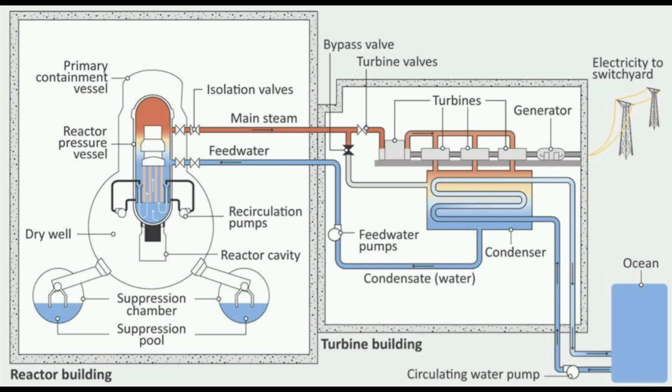Fukushima was not caused by a reactor design flaw. The reactors shut down exactly as they were supposed to. Control rods inserted, fission stopped. The real failure came later: a massive earthquake, a devastating tsunami, and then total loss of electrical power. What failed was not nuclear physics, it was dependence on powered systems.

After Fukushima, engineers didn't ask, how do we add more pumps? They asked something far more uncomfortable: what if we remove pumps entirely? What if safety does not depend on electricity? What if operators don't need to act immediately? What if gravity and natural circulation do the work?

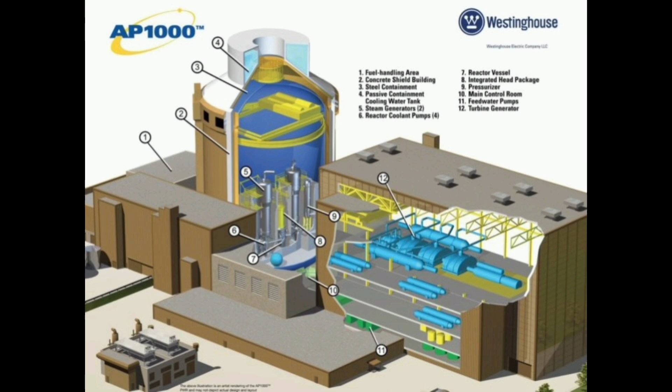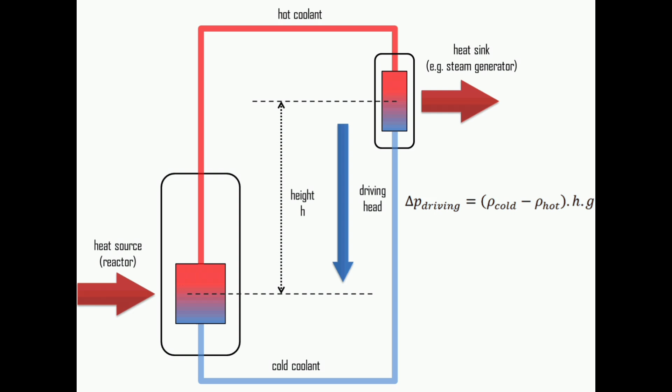That question leads directly to the AP1000. The AP1000 is built around one radical idea: if safety systems need power, they are not truly safe. Instead of fighting accidents, the AP1000 steps aside and lets physics take control. Water flows downward, heat rises naturally. Pressure differences move coolant without pumps. For at least 72 hours, the reactor remains stable, on its own.

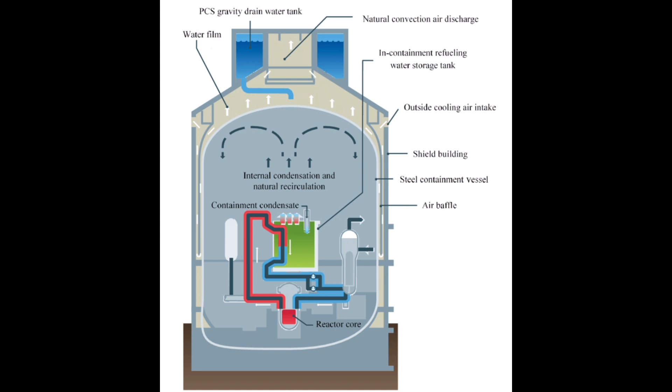At Fukushima, reactors depended on electric pumps, diesel generators, and human intervention under extreme stress. In an AP1000 type scenario, emergency cooling water is already above the reactor. It drains automatically into the core. No power, no operator action.

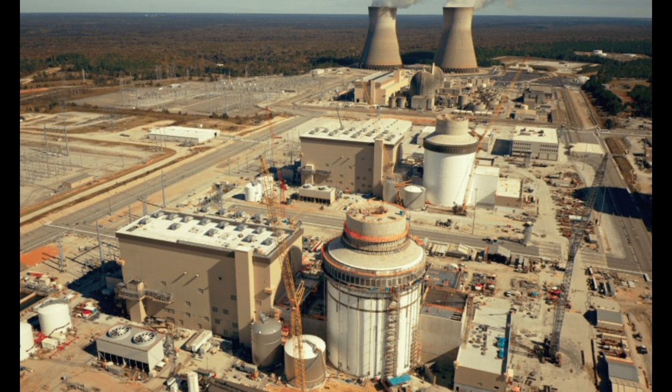So where is this design actually being used? In the United States, Vogtle Units 3 and 4. In China, multiple AP1000-based reactors are operating today. And countries like the United Kingdom, Poland, Ukraine, and India are actively studying or adapting this technology.

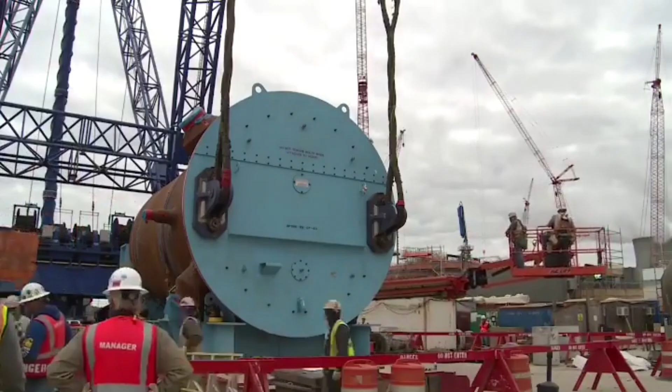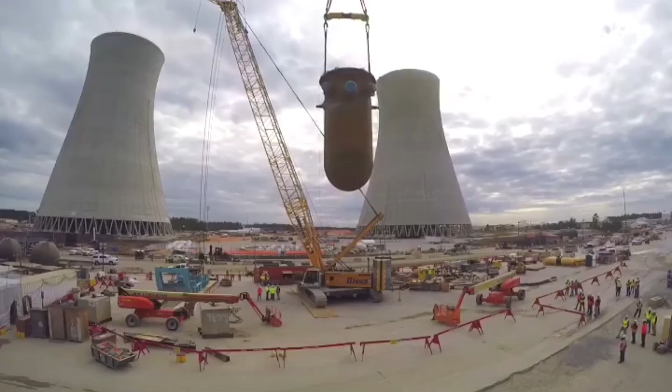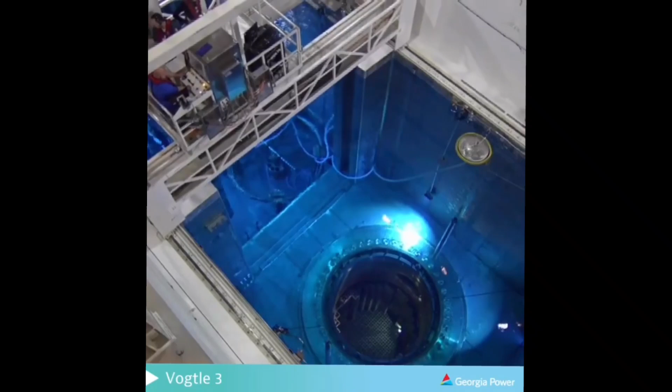Let's be honest, the AP1000 was not easy to build. It faced delays, cost overruns, and supply chain failures. Westinghouse collapsed financially, but the reactor itself never failed. The engineering worked, the physics worked. The AP1000 proved something essential: nuclear power can be made safer, not by adding complexity, but by removing dependency.